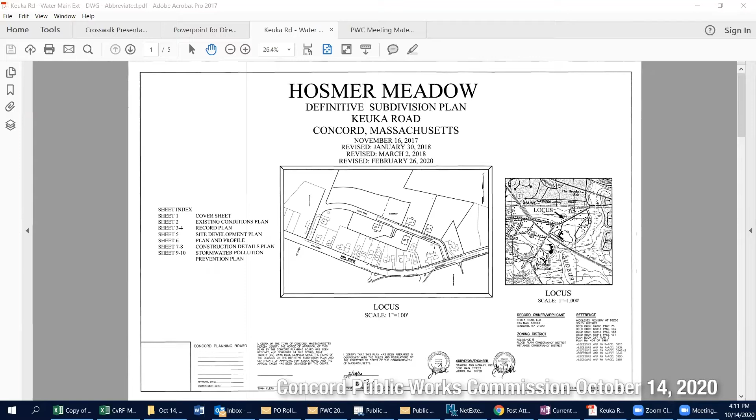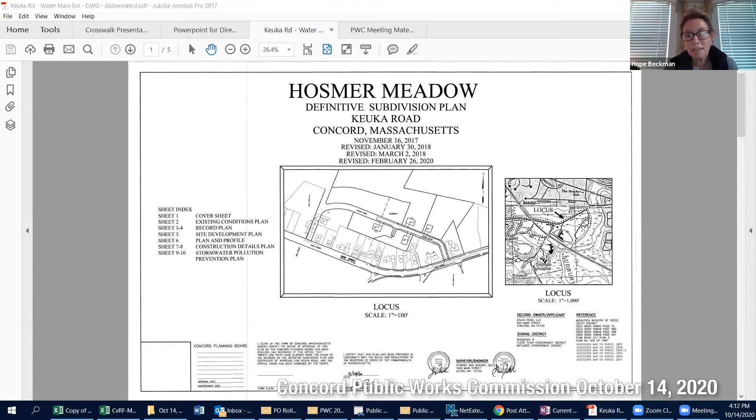Hope, are you there? I'm here. I think we're good, thank you. So the road is shown, as your cursor was just moving, as going in 638 feet to the end of pavement. And if you were to continue all the way through Keuka Road and out the other side, that was the original proposed water main. We are proposing with this waiver request to shorten that water line to the end of pavement.

Yeah, if you can blow it up just a little bit more. Okay, so it's shown just at the edge of lot 4 there where the pavement ends. We're proposing to bring the water main to that distance and end it, thereby avoiding the isolated wetlands, which go beyond that, where the word Keuka Road is written.

That would also require us to do a horizontal drilling beneath a pipe that connects to the wetlands, and we're hoping by shortening this to avoid that area altogether. We're also hoping to avoid the other side of Keuka Road, and we will not have to tie into Main Street again with another tapping sleeve. By shortening the water line, we would end up putting in a third hydrant and a gate valve by which to flush the hydrant. And I believe that's an abbreviated version of what we're intending to do.

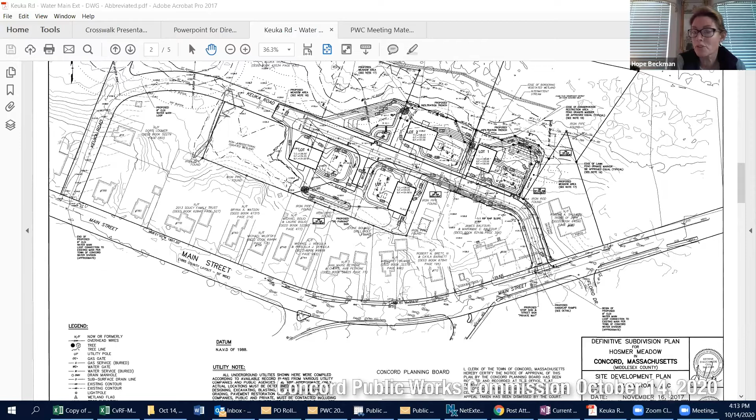And I think it's important to understand, for the commission, generally when water mains are extended in concert with a subdivision, there is a formal vetting of that and public vetting during the subdivision review process. When comments went in from Public Works, we give a lot of input on the design and configuration of the water system, the water main here. And there's a standard where, if a loop can be created, it's something which generally is advantageous.

At the time this subdivision was going through a couple different iterations, there was a significant density of residents proposed as part of this, correct? We had initially proposed 11 dwelling units, so smaller. We had identified the need for a loop at the time without a lot of focus on the details, just to comport with our standard policy.

When we learned the subdivision had been approved with only 4 units, we also learned about potential wetland impacts in this area, and concerns from people who would have been adversely impacted by construction along that section of Keuka Road and across driveways. We volunteered that given this density, we didn't see a reason this might not merit reconsideration to do just an abbreviated extension.

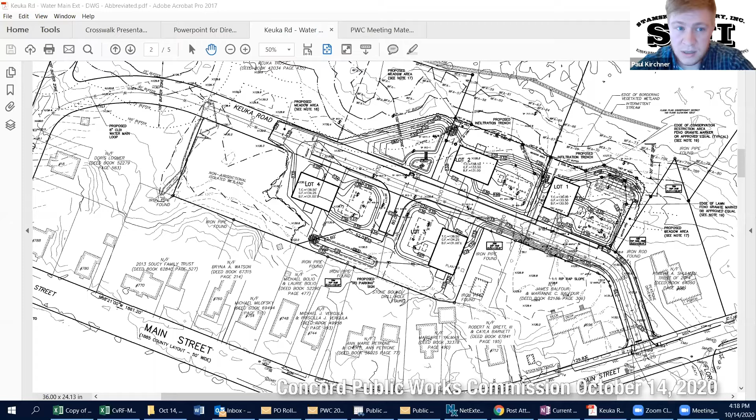That is correct. The proposal is to terminate the water main at the end of the proposed pavement, right where Alan is showing his cursor. The subdivision approval included installation of the water main through that area all the way to the other side of Keuka Road. This application is to allow construction to terminate essentially at the edge of the proposed pavement.

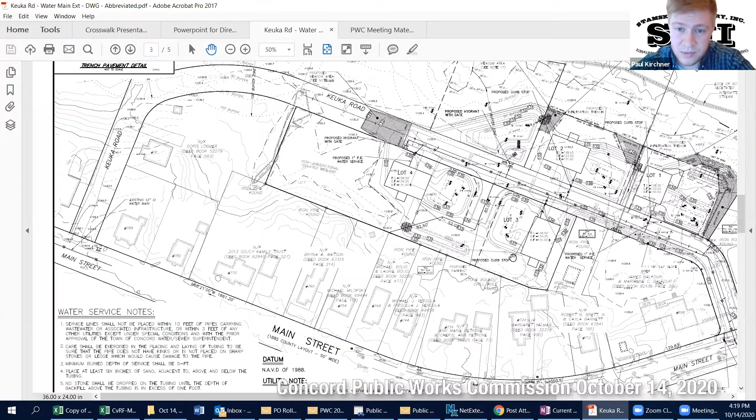So this is the approved plan Alan is showing right now, which shows the water main going through to the other side of Keuka Road, the west side. The plan we are hoping to gain approval for today is this plan, and the water main would end approximately at the end of the proposed pavement.

If I could just add to that - the shaded gray area is a meadow area. That's meadow grass.

Okay, thank you very much for the presentation.

I just want to verify with Alan that by having the hydrant at the end of the construction area, you're comfortable that water quality will be sufficient for all the new lots. Yes, loops are generally required to increase fire flow and allow for improved water quality where you get continuous flow, and sometimes there are system benefits creating linkage for increased reliability over a larger area. The benefit of this particular loop was pretty marginal at best. We talked with the fire department to get their concurrence, so we're comfortable with this design. It's not unusual in Concord for this size development.

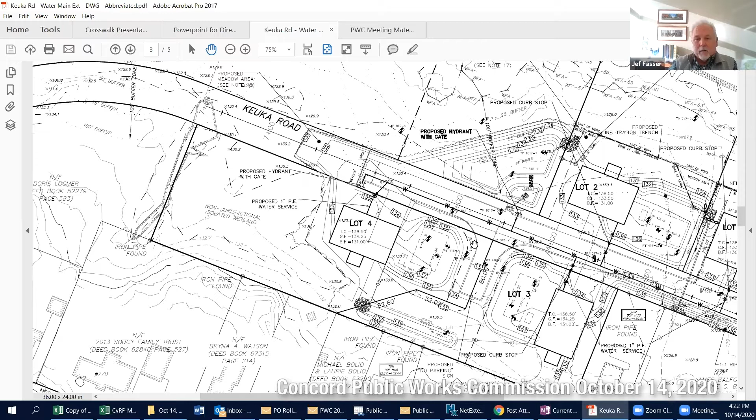And did this need additional approval from the NRC? I remember reading that, I didn't know if this was the final step, I'm just curious how the order works. It's my understanding there was a notice of intent that went with the original subdivision through the NRC, and they were supportive of the abbreviated version. They reached out to DEP - there was a superseding order of conditions, and DEP affirmed they preferred this plan as well. The town planner also provided a letter of support for the abbreviated main extension. It appeared to me that DEP does need to sign off on it, but since they've already mentioned they're in favor, it shouldn't take too long.

Are there other questions or comments from commissioners? Are there questions from others on the call today? Well, hi, if I may, this is Anna Trout. I just want to state for the record that proper notice has been received for the abutters. Thank you, okay.

This is Jack Steiner, I had my hand raised but you can take that down. I live at 760 Main, and I want to make sure that since the area the hydrant would be dumping into is a flood area - even as dry as the weather has been the last couple of days - and this is wetlands, albeit not protected wetlands, what specific analyses have been done to make sure this will be safe for the surrounding properties, given there's already a lot of water in that area? Also, the impact on wildlife would be useful to know.

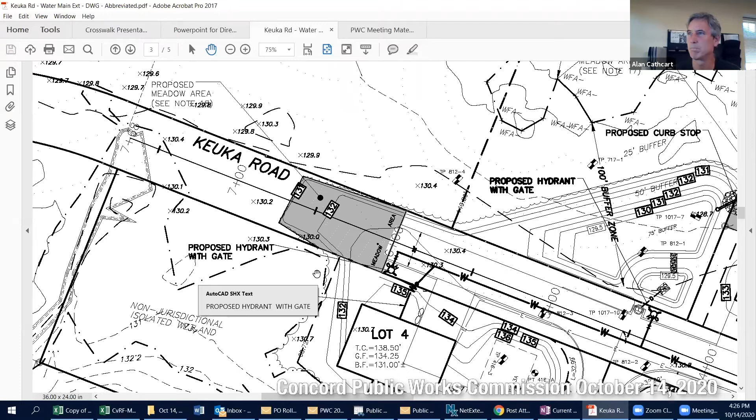Okay, so it's not a problem installing it in wetlands? It's already been installed - this hydrant already exists, it's all part of the original water main. So the pipe and everything is already in place? Yes, yes. I see, okay. Thank you, are there other questions?

Can I offer one more issue on the environmental impact? I know that both NRC and the town planner were interested in ensuring that some of the work done in anticipation of extending the main through the entire loop had some impact. I think there was some environmental controls put in and some excavation, and they requested, and I think it's reasonable to include a provision that area be restored as part of this approval. I think the commission does have that authority to have the restoration.

It's fairly de minimis, but it's an important part. If they continue the extension, there'll be restoration after the fact. But because it's now limited to this area, do you know, is this the area of interest where it says the proposed meadow area, or can you speak to that?

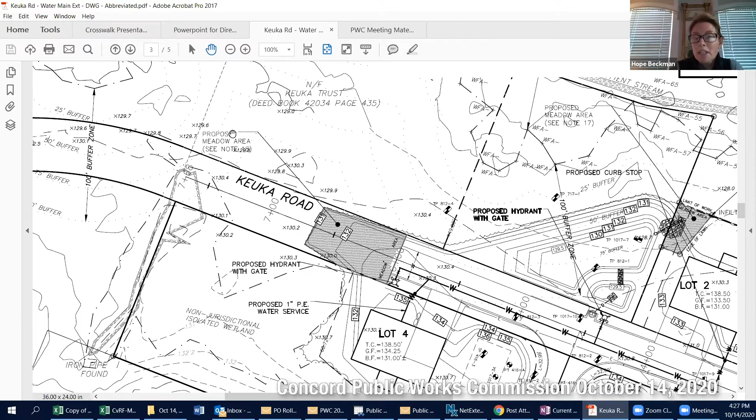Yeah, that's correct, that's a proposed meadow area, it says right here. So this is like a wetlands grass mixture that's going to go in there, after the paved area. Okay. So they requested the commission consider that as part of their approval.

Okay, great. Hearing no other comments, is there? There is one more, if I may interrupt. Hello? Okay, can you hear me? Continue. Yes, this is Miss Loomer, Keuka Road.

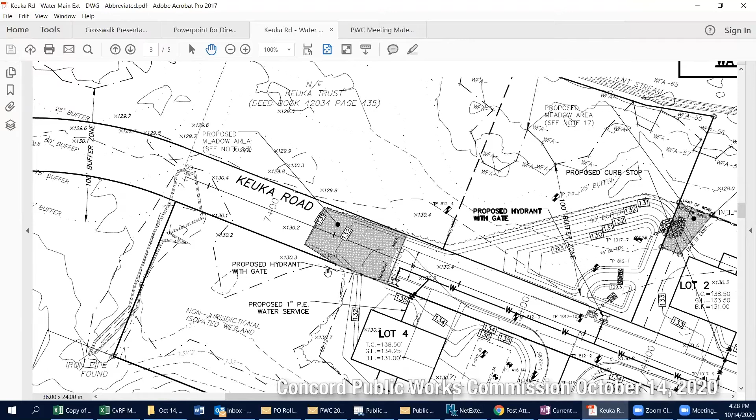Can Mr. Cathcart or Ms. Beckman clarify for me that all of the preparations for the continuous loop, the drainage preparations and the silt barriers west of the meadow will be taken down and that area restored? Is that how I understand this aspect of the proposal?

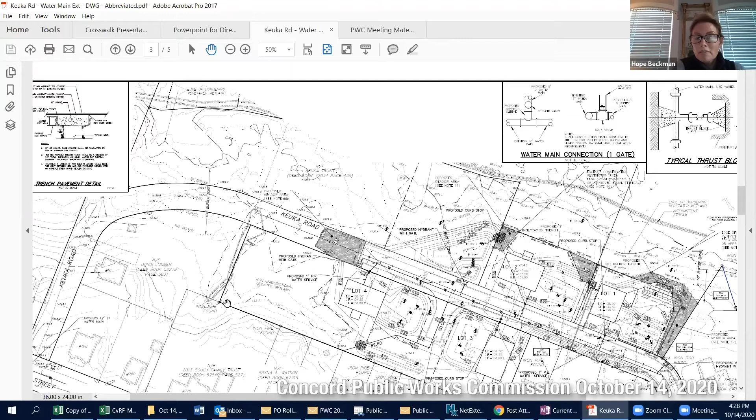The plan is to remove all of the silt fencing and so forth that was going in to provide for the extension beyond where it's presently shown on this map.

I would heartily support that. But I have an additional question. I understand that there is a preliminary plan for a 5th unit to be built just abutting the meadow area. Will this abbreviated main support that 5th unit?

They are entitled to a stub for that water main, which is included in the plan to be left in the center of the road where the main is shown. Beyond that, we have nothing to do with the 5th house. That's, as far as I know, clear. It's not yet permitted.

So to be clear, we're approving the main extension to provide the appropriate frontage for the 4 units shown on this plan. If there are any additional demands or requests to access the main, it'll have to go through the water sewer division. We have the authority to review and approve new connections.

The primary interest, and I think the question related to frontage—where I don't know the property lines definitively—it's hard to say whether that additional buildable lot, if it were to be, has frontage or not. I just don't know because it's not part of this plan and we're not in a position to review that.

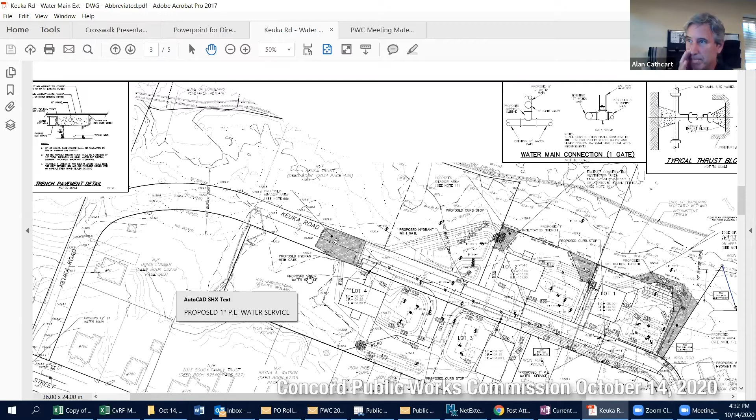This assembly's—and just to follow up, so that—oh, go ahead, Emma. Go ahead and finish, and then I'll ask my question. Yeah. I'm sorry.

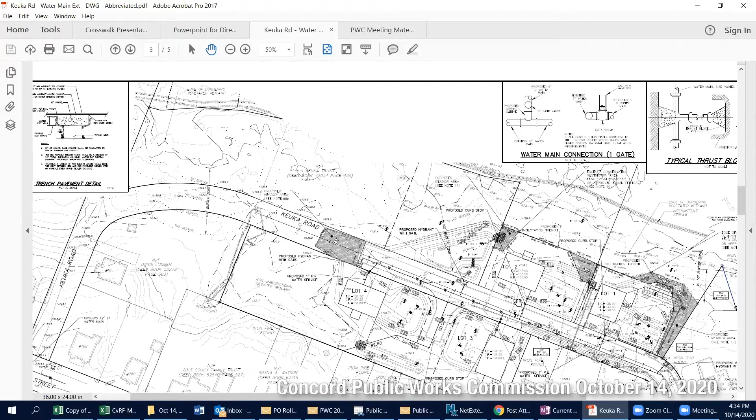Jack, you've cut out completely, we're not catching enough. I missed part of your response—I apologize if you said this already, but in terms of actual construction taking place on Main Street, to do the final hookup, will that be a protracted period, or will that happen in a day or less? He's asking if the actual hookup will take place in less than a day, or if it'll be a protracted period to do that last piece of hooking up.

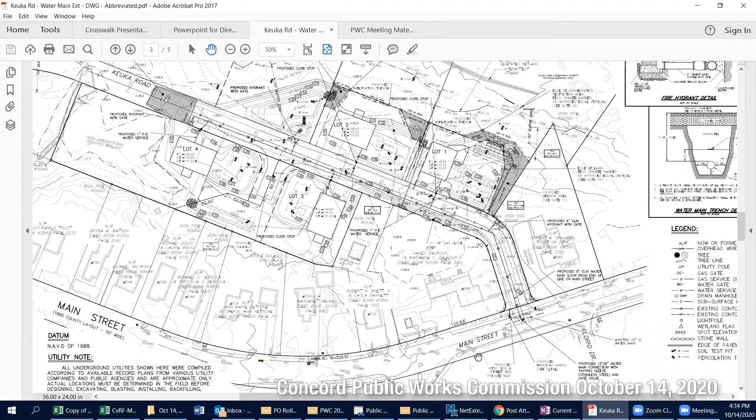Okay, thank you, sorry, I did get that now. Alright, I'm going to stop sharing the screen so we can see. There we go.

So Alan, I had another question. This is Emily Spiegel. I understand that the fifth lot, or fifth possible proposed development on Keuka Road, on the part to the west that isn't hooked up, is not part of Hope Beckman's 4-unit process. But will neighbors and abutters on Main Street be informed if that proposal for the fifth unit comes forth? Because it could have an impact on us.

So the question becomes, they will go through a usual review through the planning department. The Water and Public Works' only authority for that, for any new lot created, would be if they're looking for water or wastewater service, and there is no municipal wastewater provided. We've just discussed whether they have frontage to the main, and again, we're talking hypothetically because I don't know where the property lines are. If they have frontage, they do have the right to connect to water service. They also have other alternatives, like putting in wells, depending on where they are. So the planning process review would not be with Public Works, it would be through the town planning department and the building department.

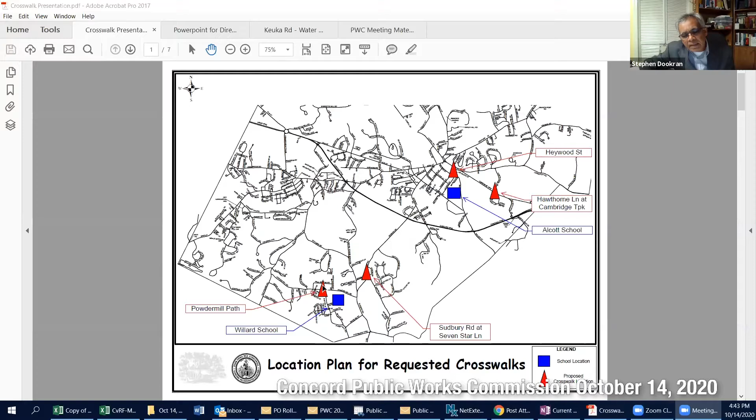It's a path that kids cross to get to the school parking lot, and residents are asking that a crosswalk be placed there.

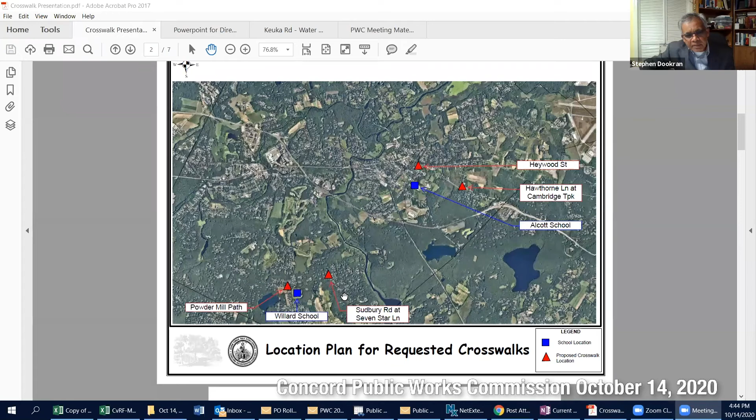The next one, the school there is that blue dot, so the path is right there on Powder Mill near the school. The other location is Sudbury Road, and later on I'll go into more detail as to that one, because that has been getting a lot of attention recently.

And we move over to the Alcott School - there are 2 related requests. The first one is on Heywood Street, where kids bike through the Heywood Meadow and want to get over to Alcott. We'll look at that and show you in a photo exactly what we're talking about. And then the fourth one is a crosswalk being requested where Hawthorne comes into the newly reconstructed Cambridge Turnpike.

If we look at the photographs, next slide - the first one, Heywood Street. You can see the path coming out of Heywood Meadow. That intersection there, Heywood and Walden, is pretty busy, and there are sightline issues.

So getting the kids safely across is important. We deal with a number of vehicles at any point in time - it's a well-traveled road, and so this needs a lot of attention in order to get something that's safe.

The next photo shows Hawthorne coming into Cambridge Turnpike. The sidewalk is across the street from Hawthorne.

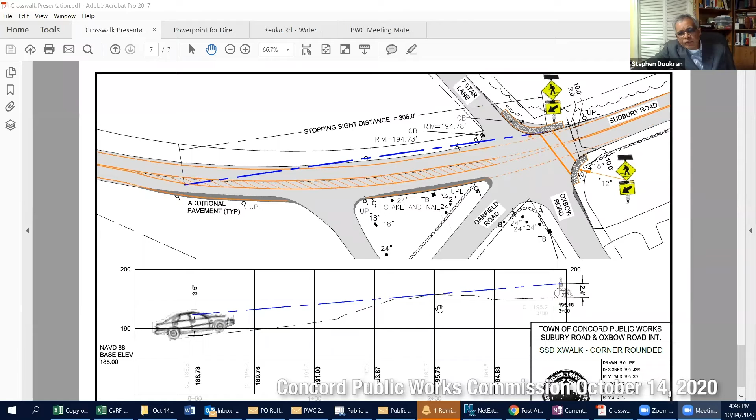I'll go into a little more detail on that later, but I want to mention the other needs regarding traffic calming and signs. We see requests for signs, as well as sidewalks, and recently requests for speed changes on certain streets. Those have traditionally been dealt with by our internal group called the Traffic Management Group. That's been in place for a while, and they take on these issues. There's a process, and their list is growing as they try to deal with these things. The minor ones are disposed of easily, like a request for a sign - sometimes that's easily done and they take care of it. But a request for a crosswalk or traffic calming is pretty significant, and we have to go by the policies and regulations in place, and often we get very involved.

As Alan mentioned, the newly formed Transportation Advisory Committee represents quite a cross-section of town government - not just us in Public Works, myself, the town engineer, and the Superintendent of Highway and Grounds. We are members of this committee, but we also have planning and land management, police, council on aging, and even citizen representatives who can bring expertise to the charge of this group. The idea is to take on these bigger issues. We've just started - we just had our second meeting - and the hope is we will deal with these bigger ones, which could lead to having to find capital funding. Going back to what I said earlier about resources becoming less and less, we'll have to find ways of funding these projects. We'll also continue to have the Traffic Management Group, and we will continue to serve as a working group supporting the efforts of the Transportation Advisory Committee.

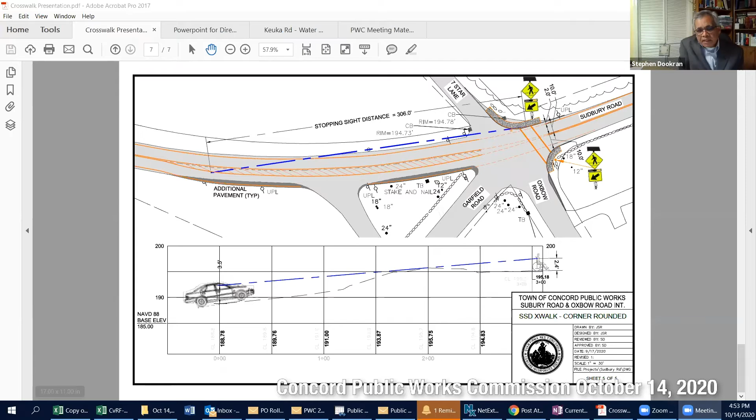I think that's about what I wanted to mention regarding all of these issues that are before us. Thank you, Steve. That was valuable.

I can see, Alan, that there are a considerable number of requests, and as we know from town meeting, Public Works has limited funds at this time. We can just hope that things will get back on a regular track, and maybe resources will be available. But I think it's important that citizens be aware that engineers are working on these projects to the extent that we can, and the construction of them may be delayed, or we may have to prioritize which ones we think we can do the best with the resources that we have.

I like the fact that you found an outside consultant to assist in evaluating some of the other sites, and the fact that the person has been used in Lincoln means that he does know at least the western suburbs of Boston, Massachusetts. Are there other questions or comments from the board members?

Yeah, I just had a question regarding the siting of crosswalks and stuff near Willard School. I know that the long-term plan for the middle school is one combined location at Sanborn, and it's unclear what the site at Willard is going to be used for 5-10 years out. Is there a utility, if these are complicated engineering things, in actually spending money there right now, if it's not as simple as just putting in a sign or something like that?

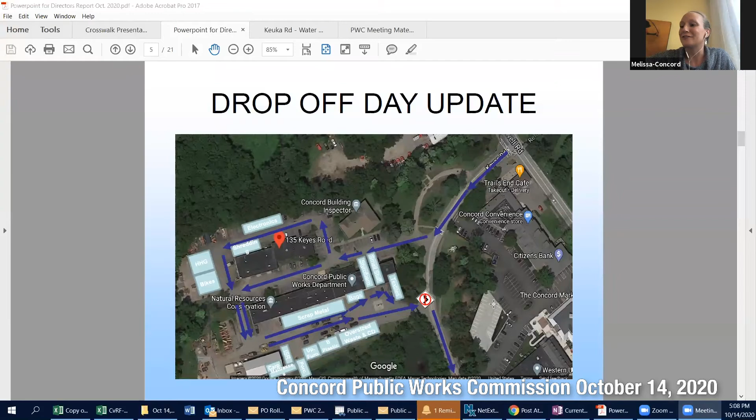Just before I started speaking, we got our 350th sign-up for this weekend's event. We have a max of 440 people we're able to accept, that's 20 people every 15 minutes. Everybody's signed up online. There have been a few challenges, but we're working through it, getting people paid and signed up. We're close to 80% capacity, with big draws being your typical electronics, shredding, scrap metal, oversized waste, and styrofoam.

For styrofoam, typically we had a lot of Boy Scouts who stomped and broke down styrofoam and crushed it into bags, but due to social distancing and trying not to touch too much stuff, people paid for their bags online and then came to Public Works to pick them up. So they'll just bring their bags right to the event, and then we'll pack them away, so there'll be minimal handling in that respect.

The other interesting thing surrounding drop-off day is that we are collecting bikes in a partnership with the Bike Connector, based out of Lowell. Because we have limited staff, we've partnered with Bike Connector to actually help us fix up the bikes this year, so it won't be CPW and other staff helping, it'll be the community group themselves. We'll be having a bike giveaway event on October 23rd in the afternoon in partnership with the Safe Routes to School program.

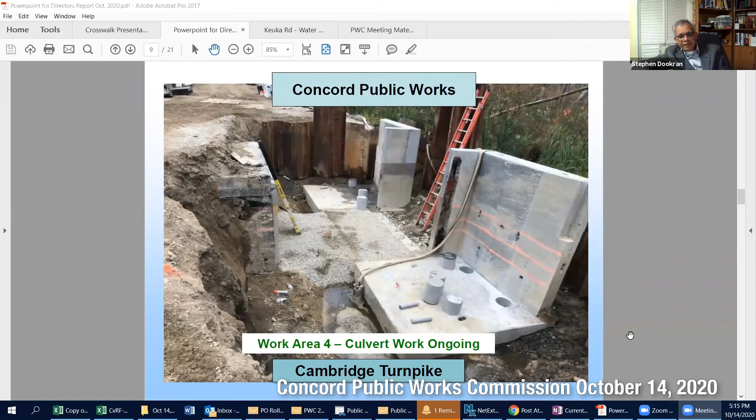So, if you have any questions about that, we could ask them afterwards.

So that's what we have to show for our report, but our full report is included in the packet regarding the other activities we have been involved in.

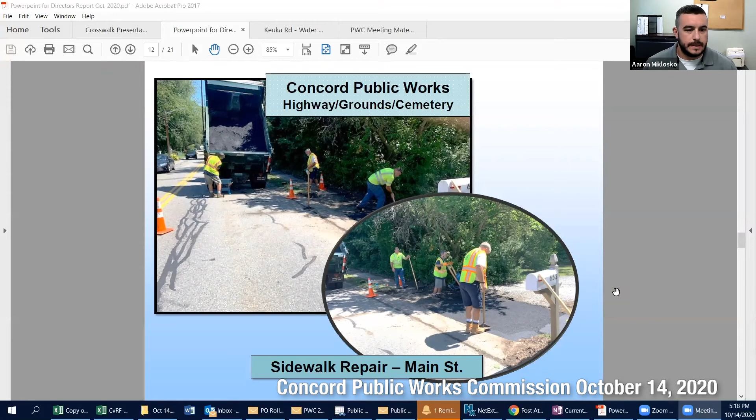Concerns of some narrowing sidewalk due to overgrown brush and deterioration in the asphalt. So we cut back the brush line, repaved the sidewalk, and this is the crew repaving the apron of the driveway right here. A number of activities similar to this took place throughout town, listed in the report.

So we went up, took some temporary marking paint, crews marked that out. We do also do a number of other maintenance activities. We completed the GMAX testing, which is actually testing of the density of the compacted crumb rubber material in the turf. That testing takes place every year to determine that the field is still safe for contact sports and activities. That took place in the month of September.

We also have scheduled basically a turf cleaning for the month of October with another contractor, so we'll be up there completing those activities before the wintertime. It's basically a cleaning and decompaction of the crumb rubber and identifying any maintenance that might need to take place later in the springtime.

We have a very active tree planting program within the division. Last year, the town received a $150,000 municipal vulnerability preparedness grant from the Commonwealth of Massachusetts. A big chunk of that grant was for tree planting initiatives and programs. We currently have a right-of-way tree planting program as well as a setback tree planting program here in the division that we coordinate. It's a mix of both Concord Public Works labor force as well as a contracted service provider.

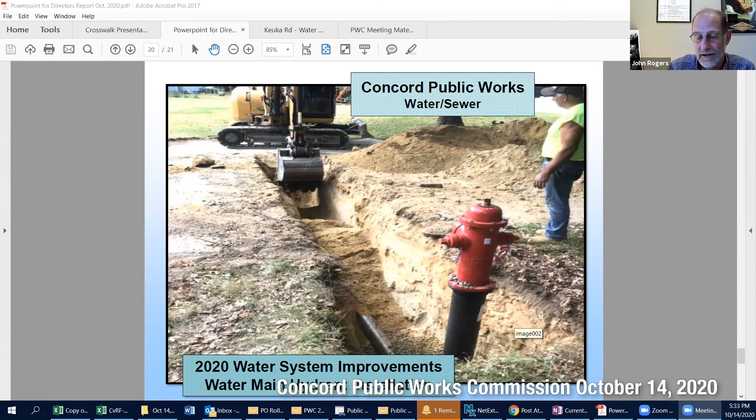This picture is over at the Peter Spring neighborhood, where the contractor's doing a fabulous job, in part because of what you see in front of you, which is sand. The area is underlain by sand, and it's fast going for them. They've been doing a great job, very good through the neighborhood, and so we're very pleased with that work. Hope they can continue to work in the sand.

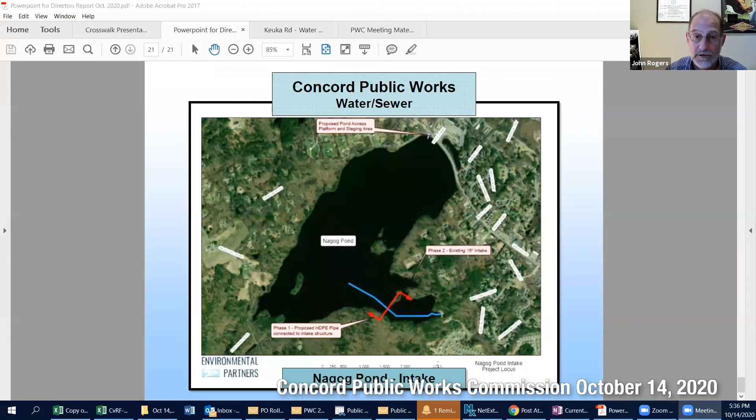We're now looking at quantifying that in a more rigorous way with the contractor, looking at ways to further reduce what we think is the minimum impacts, and working to clarify, get dialogue with the contractor, continue dialogue with the Acton Conservation Commission, which we began a couple weeks ago, and to clarify and potentially refine the construction approach for the phase 1 work, and presumably get Acton Conservation Commission's approval and begin that work this fall, as we had hoped. So that is where we are with regards to the Nagog system.

So with that, I'm here. Thanks. So that's basically an overview of what's keeping us busy, what's important. The director's report will have more details and other initiatives we're involved with, but I just wanted to make sure the commission was aware of these activities, and if you have any questions, we can entertain them.